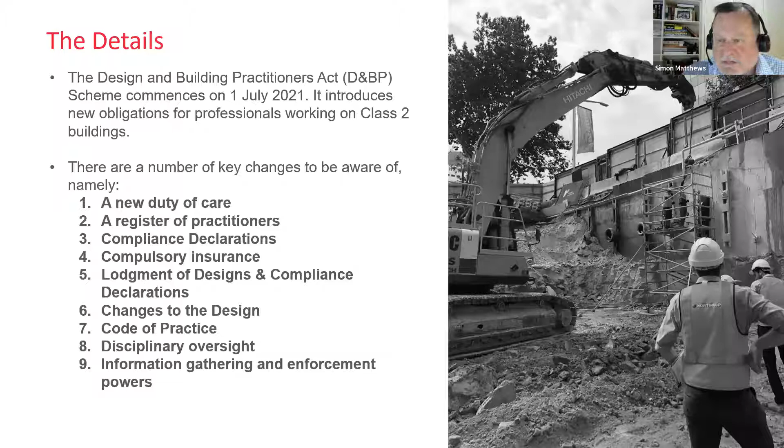So the important thing about this is it's a process all the way through. It's properly designed, it's properly coordinated, it's lodged at the New South Wales portal, and that can then be used as a reference guide should it be needed.

I suppose the most important question to ask is, what is a Class 2 building? We all know about resi and mixed resi, but we're never quite sure exactly what Class 2 means. Well, a Class 2 is a residential building which is more than just a single home. It can be, as you see here, single-story attached dwellings with a common basement. A lot of people don't even think that's a Class 2 building because of the common basement, but it is a Class 2 building.

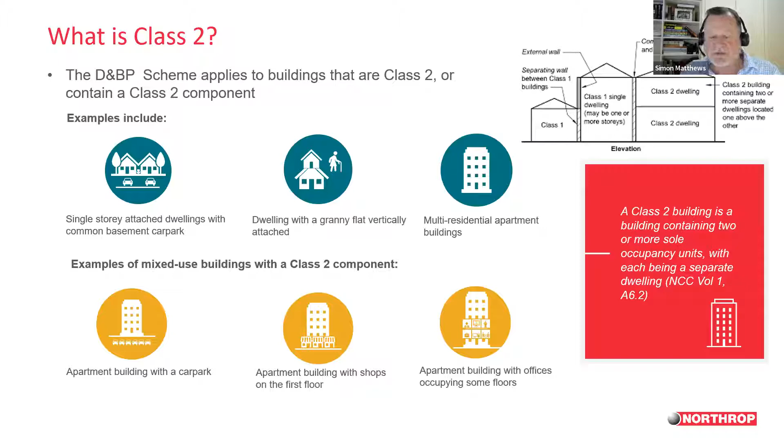A dwelling with a granny flat vertically attached is also Class 2, with someone else living in the residence. Multi-resident apartment buildings with a car park, apartment buildings with shops on the first floor, and apartment buildings with offices occupying some floors - essentially, it's any building where people live.

Okay, who needs to register? Design practitioners who prepare a regulated design for Class 2 buildings or a building that contains a Class 2 component. It's really important that if a Class 2 building is within several classes, as far as New South Wales Fair Trading is concerned, the whole building is part of Class 2 and it all needs to be lodged. So professional engineers who undertake professional engineering for a Class 2 building, and building practitioners who are undertaking building work on a Class 2 building or a building that contains a Class 2 component.

That just reinforces that's a straight little quote from the standards. There are 2 new registration schemes - this is really important. The first one is becoming registered as a professional engineer, and once you've done that, you can then become a design practitioner or a building practitioner. There's a difference between a design practitioner and a building practitioner. A building practitioner doesn't necessarily need to be a registered engineer, but they need to be a registered builder.

So registration and compliance - who needs to register? As you can see, there's a list of people. I won't go through it all, I'm sure you'll jump to the one you're interested in. But the most interesting thing is all of these, you need to be a graduate, have a university degree. Apart from drainage restricted, and fire systems - being fire detection and alarm, sprinklers, hydrants, hose reels. The reason that's different is those particular courses aren't run at university, or the courses that are run aren't recognised. So in that case, other courses are accepted, be it diplomas etc, specialised in those particular areas.

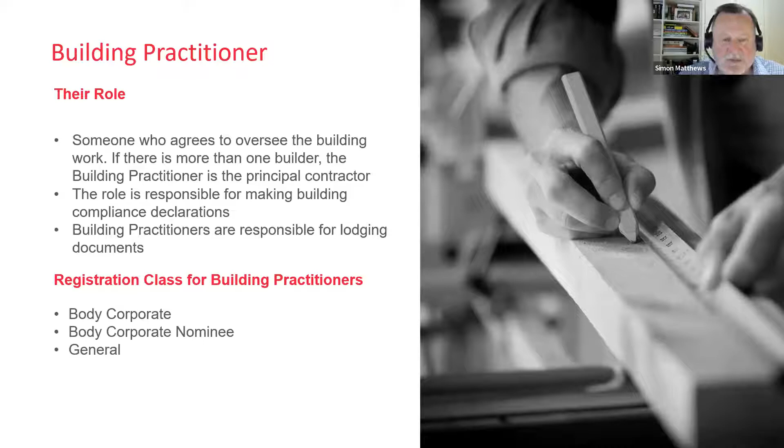The moving parts. Does everyone need to register? Well, no, they don't. The people working on the design or signing it off need to be registered, but not everyone working on the job needs to be registered. They can work under the supervision of someone who is registered.

Submission of documents - the building practitioner is responsible for lodging, and the head contractor must be registered as a building practitioner. We've had conversations with some developers at the moment, some of the smaller ones who are struggling with this concept, that they actually need to be involved. So we've been helping guide them through that process.

So as you can see, we've got the form there on the side, what you need to do - it's a matter of filling that in. What's also really important is to state that you've actually reviewed and coordinated your design with all the other disciplines, so it's not just a silo design. We have to look at everyone else's design.

So when they come to site, you're actually producing nearly a set of workshop drawings. That's a quantum leap from what we're used to doing, even doing tender drawings. This takes it up to the next level. So it's really important that you're aware you have to look at, see, review, and state that you've coordinated with everyone else.

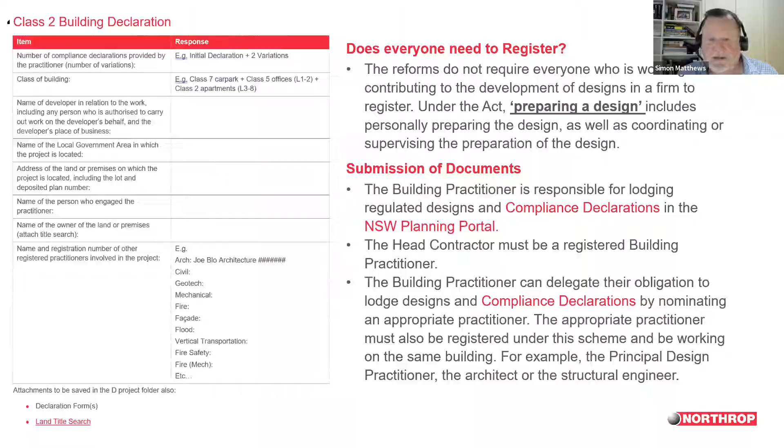Regulated designs - design plans and specs reports prepared for the building elements or performance solution for building work, considered important, likely to have a greater impact on the safety and quality of the construction of the building, and building work construction, alteration or addition, or the repair, renovation and protective treatment of a Class 2 building. All of those need to be regulated designs, in accordance with the standards, and have to be signed off accordingly. Regulated design must be lodged before any building work commences.

This is a really important part - if you've got a Class 2 building which has multiple other classes in it, i.e. a car park, basement car park, maybe a ground floor retail area, referred to as mixed residential, the whole design needs to be submitted. I know some people are trying not to do that, but I think the intent is that you have a job fully designed all the way through from the basement to the top.

Lodgement of documents on the New South Wales portal ensures there is a record of compliance, so the cause of defects can be more easily determined. It's a little bit like when the QA came in - it's very easy to go back and find out what wasn't designed properly and therefore how to rectify it.

After the 1st of July, you will need to wait until all designs and declarations have been lodged on the New South Wales Planning Portal for the entire building before works can begin. As I mentioned before, some people have not quite embraced that.

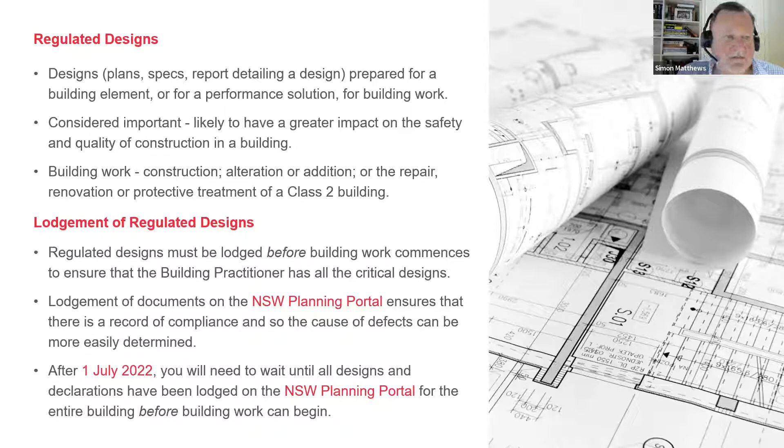If you change your design after it's been lodged, variations related to a building element or performance solution will require an authorised design practitioner to declare a new design. This doesn't have to be the same design practitioner who did the original design and had it lodged - it can be someone else, as long as they're registered.

Variations to an aspect of a regulated design unrelated to a building element or performance solution do not need to be signed off, but must be recorded by the building practitioner in a variation statement. Every time you do a change, the variation needs to be lodged with the New South Wales Planning Portal within one day of the variation, alongside the design compliance declaration form.

Work may need to stop so that the varied design can be prepared and declared within this time frame. That's something to be really wary of, particularly on tight jobs with programs - it's always push, push, push. There's a process that needs to be followed, and you could expose yourself if this isn't followed properly.

As previously mentioned, the person who did the original design, which was signed off and lodged, doesn't need to be the person making changes. So if you're on the construction side with subcontractors working on the job and changes happening, they need to be registered as a design practitioner. This also means by the end of the job, you've actually produced the as-installed documents, because all your changes are being lodged and recorded as they happen.

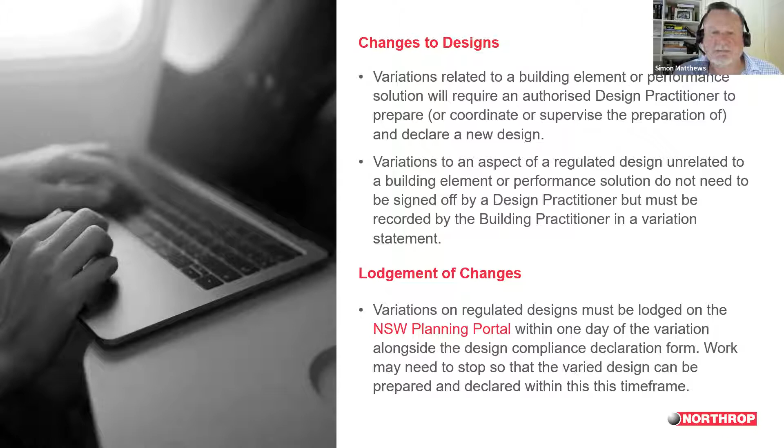Okay, changes in the original design. As I've just mentioned, do variations to a design need to be made by the original designer? No. The building practitioner can ask any design practitioner who is authorised within the scope to do that. So that's really important to know.

It's also important to note, as previously mentioned, that you've got one day to turn it around. The idea is that when the original designs are submitted to the New South Wales portal, they're fully worked out and fully coordinated. There shouldn't be any changes unless the client wishes to change something, depending on market forces and trends.

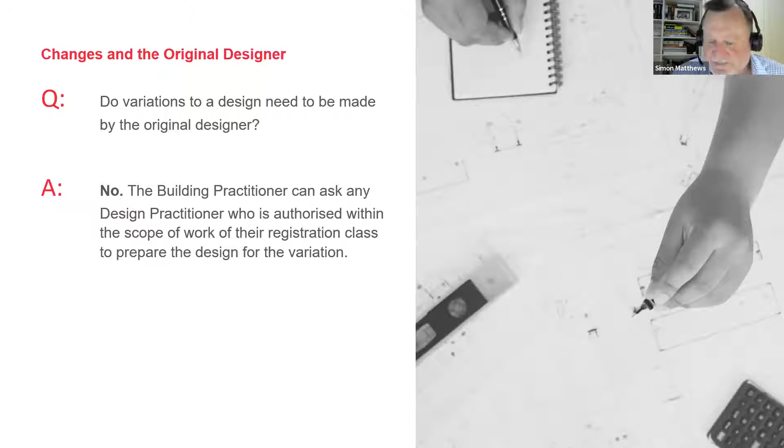Okay, so how does this apply to the different disciplines? I'd like to bring my colleague Peter into the conversation, and he'll just describe what's happening in the mechanical system.

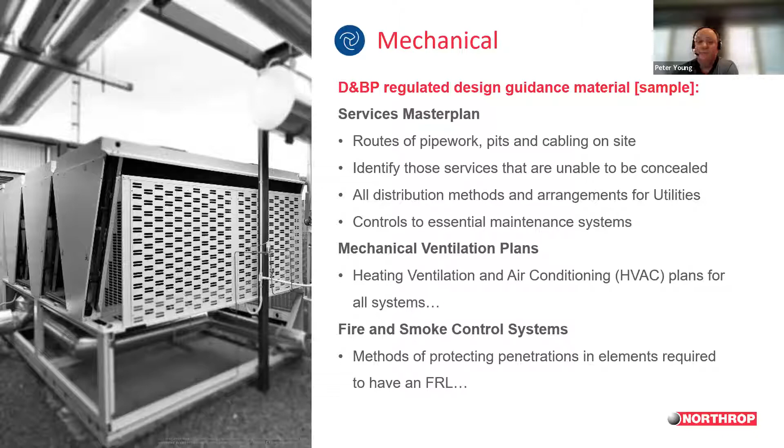So in terms of electrical, the main thing is we need to prepare a site plan showing the locations of the substations, lead-in conduits, cables, cable routes, pits and pipe systems, and any services that we cannot conceal, such as cable trays inside the buildings and such. The main important thing is we need to document all the distribution method from the main switchboard up to the endpoint.